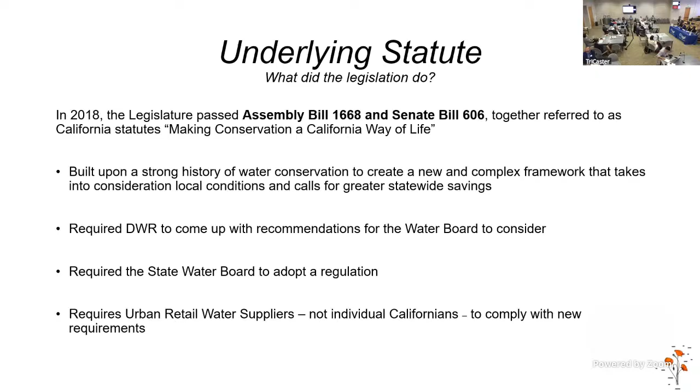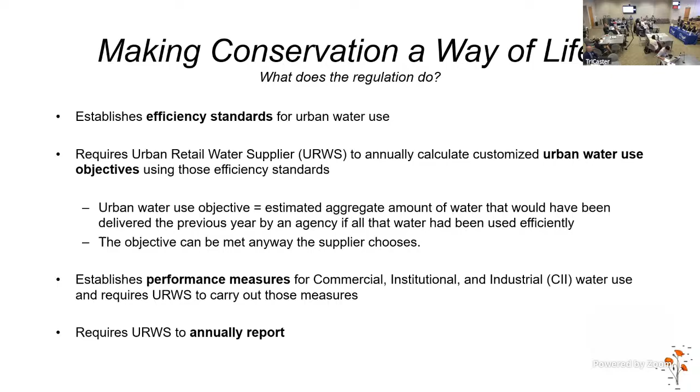The regulation itself that the board adopted was comprised of what we called efficiency standards. The way it works is we developed efficiency standards—for things like indoor use and outdoor use—and the water suppliers are then required to develop water budgets that they have to comply with based on those efficiency standards. It also established performance measures that apply to commercial, institutional, and industrial users. And then, like I said earlier, it required the urban water suppliers to report and comply with these water budgets.

This graphic here, sort of like an equation in graphic form, really is what I consider the corpus of the Making Conservation a Way of Life regulation. It requires the water suppliers to calculate what's called a water use objective, which is essentially another word for budget. Objective was the word in the legislation, and it's the word we use in the regulation as well, but that essentially is a budget. And this budget is comprised of a combination of variances.

These are basically special additional budgets for things that are unique to various water suppliers—things like water suppliers in the desert where there's a lot of water use associated with using swamp coolers, or service areas where maybe there's a heavier presence or prevalence of livestock, things like horses and llamas. To give you a sense of the complexity of the regulation, it actually specifies that for a llama, the efficient use of water per day is 8 gallons. That's just an example, but it's very detailed.

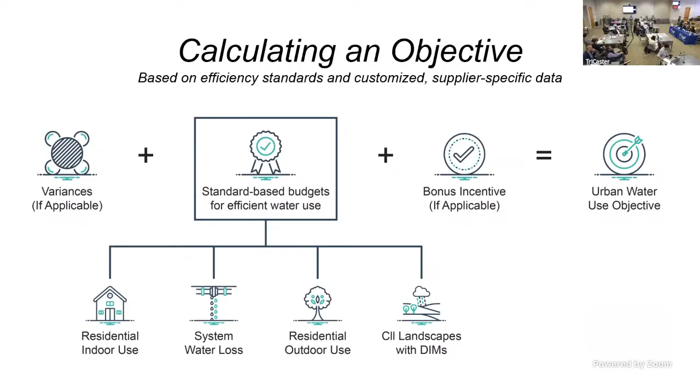So the regulation doesn't apply to any individuals. It applies to the state's 400 largest urban water suppliers. Urban water suppliers range in size from LADWP to very small suppliers, where the smallest level would be a supplier who has 3,000 service connections or delivers more than 3,000 acre feet a year.

Okay, so in August 2023, we began our rulemaking process, and that's when we put out our draft of the regulation. I don't want to make it sound like that was the beginning and there was no work before that. I have a subsequent slide where I'll talk about some of the public engagement. But we did a lot of pre-rulemaking work, both the Water Board and the Department of Water Resources.

We officially began the rulemaking process in August 2023. That starts a clock of one year in which you have to complete the rulemaking process, and if you don't complete it, there's essentially a reset and you have to start over. So a year, as I learned, is not a whole lot of time to get across the finish line on a regulation like this.

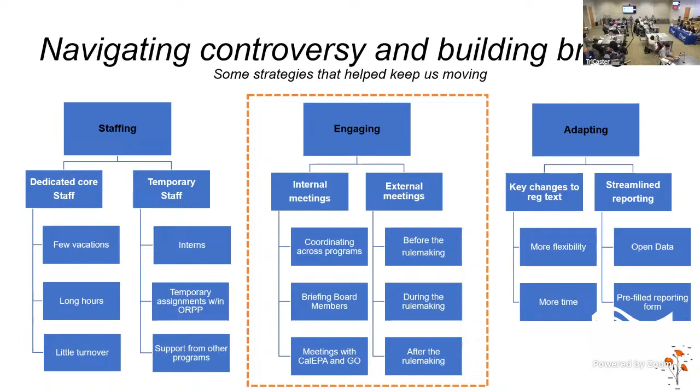But to me, of these three ingredients, the secret sauce was the engaging element. That is where the tide shifted and the momentum started moving more in favor of progress, I would say. So let's go to the next slide, where I want to focus a little bit on the engagement part.

After the workshop, the board directed us to do more engagement. So we created this work group process. It was November and December of 2023—the holiday period. We held over 20 multiple-hour work group meetings scheduled during this two-month period. We invited thought leaders from the water conservation community, both from the water supply perspective and the environmental perspective.

At our first meeting, we put together a list of all the concerns we thought we heard, and we talked to them about it. We asked them, are these the right things? Is there anything you want to add? We went through that process, then divided the concerns into a series of 4 or 5 different sub work groups, and held these 20 meetings over the holiday period, making sure first we understood the concerns.

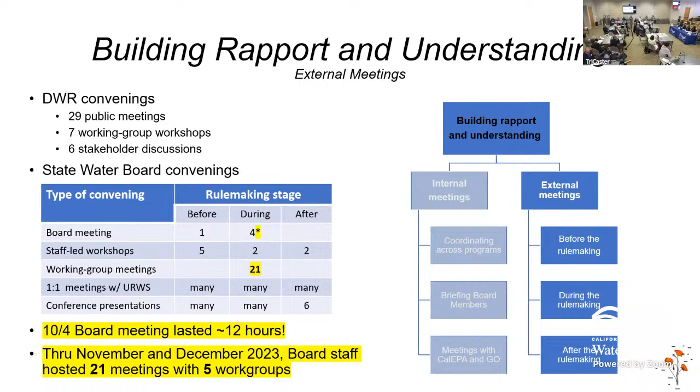The other communication that was really important was our internal communication. We did a lot of staff outreach, talked to different divisions and organizations, got their input. Most importantly, we set up a series of detailed briefings for our board members, where we listed each issue identified as a concern from one stakeholder or another. Where there was consensus, we had a recommendation, and generally our board likes consensus—if everyone agrees, we tend to go with that. But more often than not, there were areas with divergent viewpoints, and all we did there was document the water supplier perspective, the conservation group perspective, a recommendation, and options.

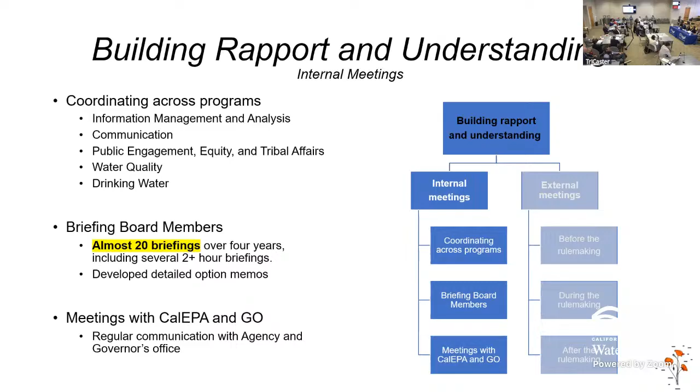And we methodically went through a series of multiple briefings, got our board members' perspective, and then used the totality of the input from our board and from the stakeholders to make adjustments to the regulation I talked about earlier, mainly more time and an alternative compliance pathway. There were many more changes, but those were the big ones. Let's go to the next slide.

We put out the revised regulation, and I don't want to say everybody was happy. There was definitely concern from the environmental community that we loosened things up too much. In fact, one environmental group leader said the name of this regulation should be changed to 'Waiting for Conservation as a California Way of Life,' which, to my chagrin, I have to admit was a clever line for a newspaper article.

But here I have a quote from Ellen Hanak of PPIC, a well-respected person from a well-respected entity, who put out an editorial recognizing that the water board had listened to the concerns and made changes. The quote states: 'The state water board has made some practical adjustments that will give more flexibility to water agencies responsible for making tough decisions. We commend the board for this, and we hope that it stays its course.' That was a pretty interesting quote—I've never really seen anything like that for a regulatory agency. So I was impressed that they could recognize the board had adjusted.

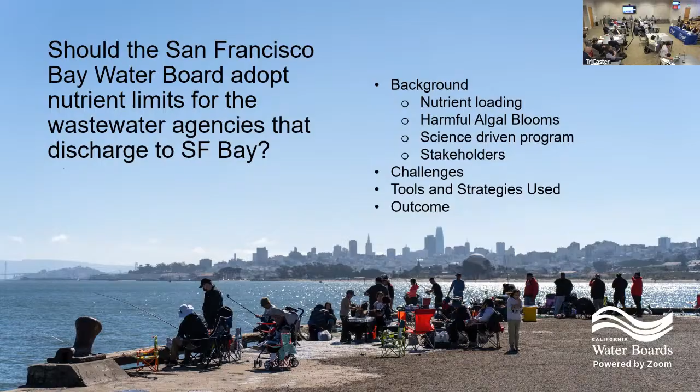Historically, nutrients had not been a problem for San Francisco Bay, because the growth of algae in the bay had been impeded by suspended sediment, which limits light penetration, strong tidal mixing, which limits periods of stratification, and filter feeding clams, which eat up the algae and keep their population low. But as I mentioned, around 2010, there were some clues that the Bay Area's resilience against high nutrient loads in the bay may be waning.

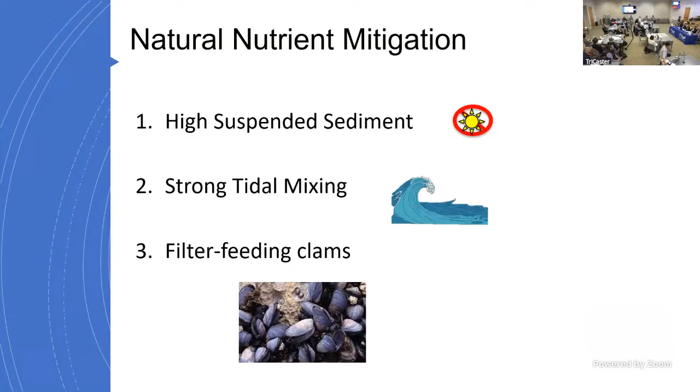Because of these growing concerns, the San Francisco Bay Water Board issued their first nutrient permit in 2014. This did not call for any load limits, but instead focused on better understanding the problem. We worked with the 40 wastewater agencies and said, let's let the science inform the regulations. So we required the 40 wastewater agencies to monitor their effluent discharge to the bay, to know what their discharge of nutrients was. We required them to do a regional study for each of them to evaluate the options for them to reduce nutrients. And we required the 40 wastewater agencies to collectively contribute $880,000 per year over the 5-year term of the permit towards nutrient monitoring, modeling, and science studies.

Then the second permit that the Water Board issued in 2019 also did not limit nitrogen loads in the bay. However, it did forecast the need to cap nutrient loads with a 2024 permit. The 2019 permit continued the effluent monitoring required of the wastewater agencies, requiring them to report yearly their nutrient loads. We required a study by each of the wastewater agencies: the first permit looked at conventional treatment options to reduce nutrients; now we said we want you to look at multi-benefit solutions, like what you can do with water recycling and reducing nutrients, or implementing other nature-based solutions such as horizontal levees.

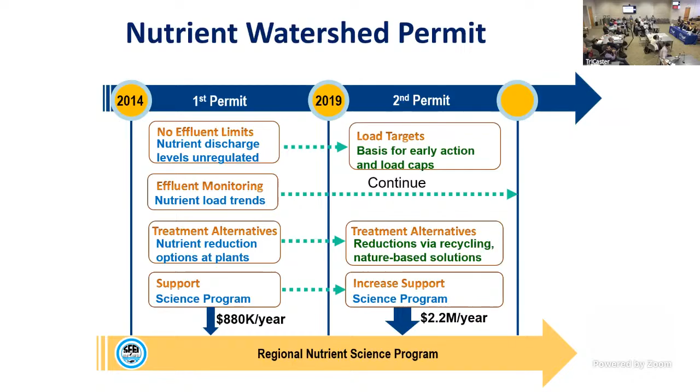Things changed significantly in the summer of 2022 when the conditions that typically limit algae growth in San Francisco Bay were no longer present. That year, there was a significant harmful algae bloom of the species Heterosigma akashiwo. The bloom formed in a channel between Oakland and Alameda and spread to the South Bay, consuming all the nitrogen in the water, resulting in extremely low dissolved oxygen levels over a large area, leading to hundreds of thousands of dead fish throughout San Francisco Bay.

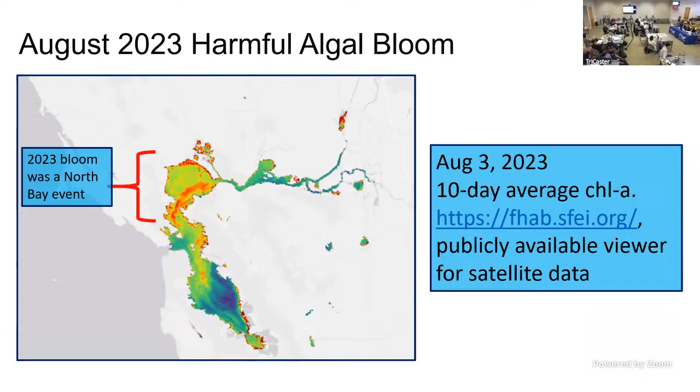It's important to note that nitrogen levels are high throughout the bay, making it susceptible to significant blooms. In 2023, there was another Heterosigma akashiwo bloom, this time in the North Bay. While it was not as severe as the 2022 bloom, it did result in observed fish mortality, including dead sturgeon.

Because of the large algae blooms that occurred in 2022 and 2023, we made findings in the permit that there is a reasonable potential that the wastewater treatment plants discharge nitrogen at levels that could cause or contribute to an exceedance of the basin plan's narrative biostimulatory substances objective during the dry season.

When such reasonable potential exists, federal regulations require that the permit include effluent limits that are protective of water quality. To develop numeric limits, we translated the narrative biostimulatory substances objective by using a calculated criteria for dissolved oxygen and supplemental information.

Now I want to take a minute to explain how we established our quantitative relationship between wastewater nitrogen loads and dissolved oxygen levels in San Francisco Bay, and then how we use this relationship to determine the load reductions necessary to achieve the narrative objective. This detail is an important part of the decision criteria we ask the board to evaluate, and that we explain to our stakeholders.

So the 2022 phytoplankton bloom is our critical condition for our calculations to establish the relationship. This means that the bloom represents a set of circumstances in which beneficial uses were harmed, and therefore provides the framework for us to evaluate how to reduce the impact.

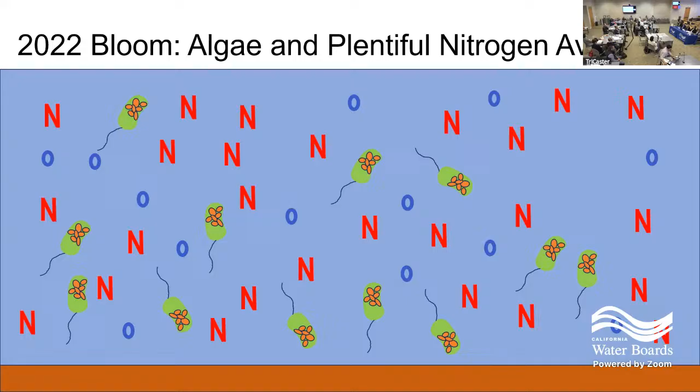But in the summer of 2022, conditions turned out to be just right for the harmful species to grow very rapidly and use up all the nitrogen in the water and achieve a huge abundance. A couple of points to make here: nitrogen in the bay was drawn down to a concentration where we could not really detect it. Basically, the Heterosigma akashiwo were at a buffet, and they were eating up all the nutrients, growing and propagating throughout the bay until there was no more nitrogen.

Second point: because of the chlorophyll measurements, the amount of nitrogen algae produced was comparable to the amount expected if all the available nitrogen fueled the algae growth. Both of these points are important for our calculation approach.

So what happens next is when the bloom ended or crashed, all that phytoplankton died pretty rapidly, and much of it sank to the bottom.

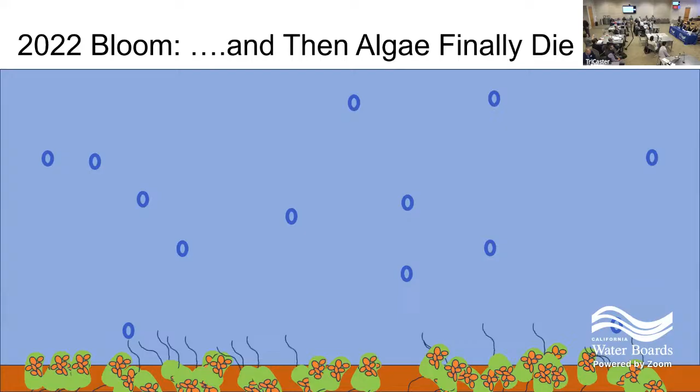And when the dead phytoplankton was digested by bacteria, oxygen in the water was consumed, so that at least temporarily, the low oxygen concentration harmed aquatic life, resulting in massive fish kills throughout San Francisco Bay, and as you saw in the photo, in Lake Merritt.

I've run around Lake Merritt for over 20 years, several times a week. I didn't even know there were that many fish in the lake. It was shocking—the entire surface was covered with dead fish, all different species.

Another important piece of information we got from the data collected during the bloom crash was that the amount of oxygen consumed matches what one would expect to be consumed based on the amount of phytoplankton in the water prior to the crash.

So our strategy is to reduce nitrogen loads to limit the nitrogen available for algae growth, for a severe bloom like 2022. We don't want them having that buffet anymore and allowing the propagation—they can't control themselves because they just eat it all up. So if there's going to be a bloom, the reduced nitrogen would mean less algae produced and more oxygen left after the algae are digested.

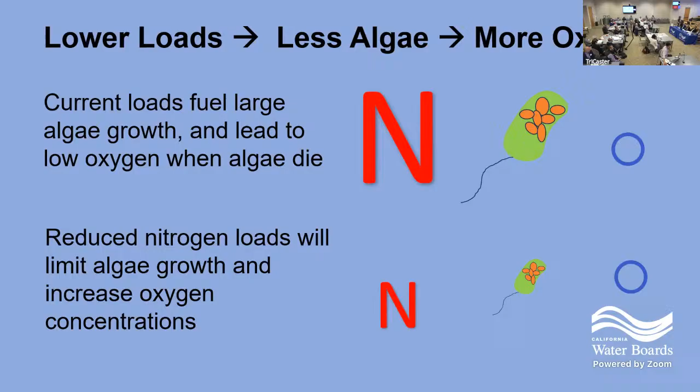The first question we needed to answer was: how much oxygen is enough to protect beneficial uses such that we can meet the narrative objective?

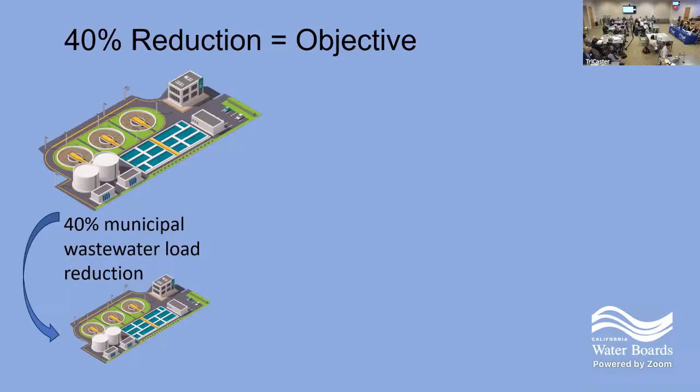So we found the wastewater load reductions of 40% from the 2022 baseline would reduce the nitrogen in the bay enough such that, even if all the nitrogen was completely converted into phytoplankton during a severe bloom event like 2022, and then all the phytoplankton was digested by the bacteria, enough oxygen would remain in the bay to protect beneficial uses.

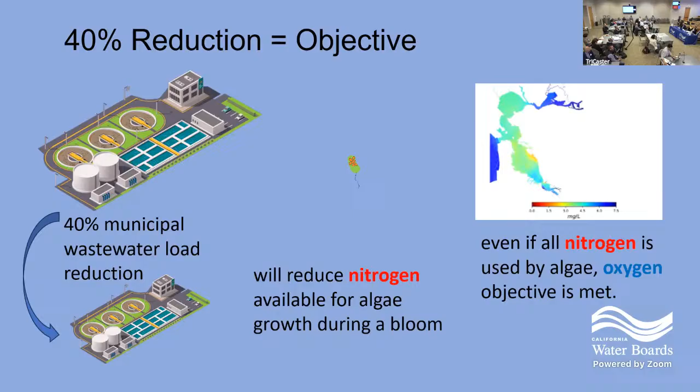Now what I want to do is switch gears and describe how we translated these model projections into effluent limits. So in 2022, wastewater loads were about 44,000 kilograms per day of nitrogen in the bay. So to achieve a 40% reduction that's necessary to protect beneficial uses, nitrogen loads would need to be reduced to about 26,700 kilograms per day.

So the permit took a bay-wide approach to final compliance because the entire bay has high nitrogen loads and is vulnerable to nutrient enrichment. So if the bay-wide or aggregate load limit is met, each discharger is considered in compliance. If it's not met, then dischargers that don't meet their individual limits are in violation.

We worked extensively with the stakeholders. And when I say extensively, we met individually with each of the 40 dischargers, and we met with them as a group. We met with Baykeeper. We met with Sierra Club. We met with EPA. Finally, I'm like, how do you thread this needle? They all have different opinions.

Baykeeper, Sierra Club said why don't you reduce nutrients by 70%? Some dischargers were on board with 40%. Some said no. So we brought them all in the same room. It's like bringing my 3 sons in the same room. We're going to work it out. So we brought them all in the same room and let them all hear each other's opinions, and kind of weaved it, like threading the needle, figuring out what's reasonable and what the science is saying.

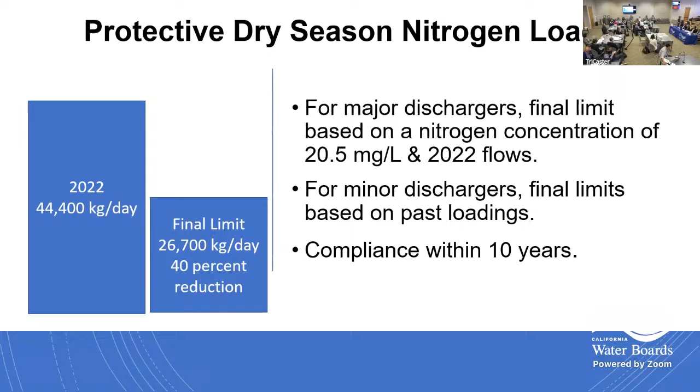So then the big challenge was the 10-year compliance schedule. And they said, we want more time. And so what I explained to them is, per the state board compliance schedule policy, we're all one water boards, the maximum time we can allow is 10 years. But we recognize for multi-benefit solutions such as water recycling or horizontal levees, they do take longer. So we said, we will see what we can do to get you more time, and I'll talk about that in a minute.

So now that I've covered how we developed the nitrogen limits, I just want to briefly summarize the third permit. Like the first 2 permits, it required monitoring and reporting. They had to continue to fund the science program at a tune of $2.2 million per year.

And I want to acknowledge now, when we took the permit to our board in July of 2024, we had been working for 10 years under a permit with the wastewater agencies in the Bay Area. And I want to acknowledge that they had contributed at that point $15 million to the monitoring and the studies to make sure we had good understanding to inform the regulations. And with this new permit, they're committing to continue to fund $2.2 million per year of the studies.

We have interim and final limits, and basically we've asked them to work together in regionally planning their upgrades. And then I'll talk more about the 10 years in a few minutes.

So this has really been a stakeholder-driven process, and you've got the regulators who want to do the right thing and inform the science. You've got the scientists who, some of these PhDs, no offense to any PhDs in the room, can get really into the science, and have to make sure we see the forest through the trees, and we have to take the science and interpret it and make policy decisions, bring those to our board. That's our job. And then you've got the enviros who really want to protect the bay. They're not as concerned about the money.

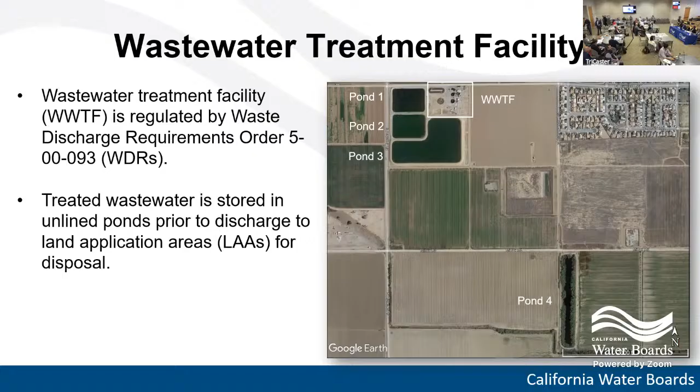Their wastewater treatment facility is regulated by Region 5 under a WDR, waste discharge requirements, and they treat wastewater and store it in unlined ponds prior to discharging to land application areas.

So this event, what led up to this event started actually, like most enforcement cases, several years before. In 2021, the city called up the regional board and let them know that they self-reported their non-compliance with the WDRs. The city engineer let them know that they were having issues with one of their ponds, specifically Pond 3. It was constructed largely above grade, and they were having seepage issues.

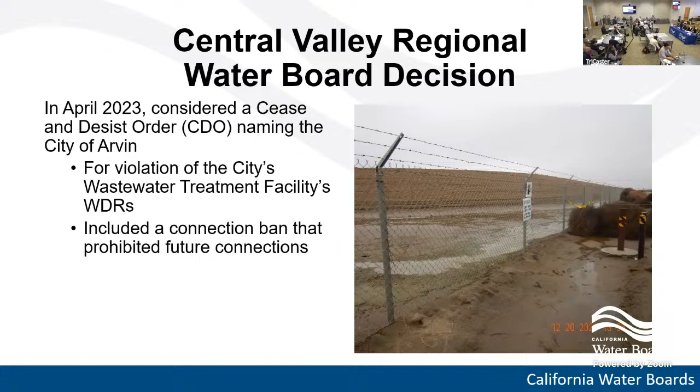Really what triggered it is in 2023, regional board staff went back out to the facility. They conducted additional inspections. They noted that the city was applying unauthorized land application areas, using them at non-agronomic rates. They were still using Pond 3, even though it was in disrepair and having issues. Ultimately, what regional board staff concluded was that the city did not have adequate storage and disposal capacity to manage their current wastewater stream.

Restricting connections was going to be necessary, wastewater connections, to make sure that the city could make the required repairs, which were going to have to occur over a number of years, and return to compliance with the WDRs, or acquire a new permit or an amended permit, as well as additional land application areas. So staff prepared a cease and desist order based on the city's WDR violations going back to 2021 and through the course of this time, and brought it before their board.

So what was the regional board staff's perspective? They were generally concerned about not only the pond seepage and the wastewater that was coming out of the pond that was near a road site. There were land application areas and kind of default ponds being created with some bermed areas that the city were using, and public access to those areas without signage. There were a number of issues going on, but ultimately it was just the long-term sustainability. Continued growth and construction in the area was only going to increase demand on this already dysfunctional system, and they needed to find a way to get it back into compliance.

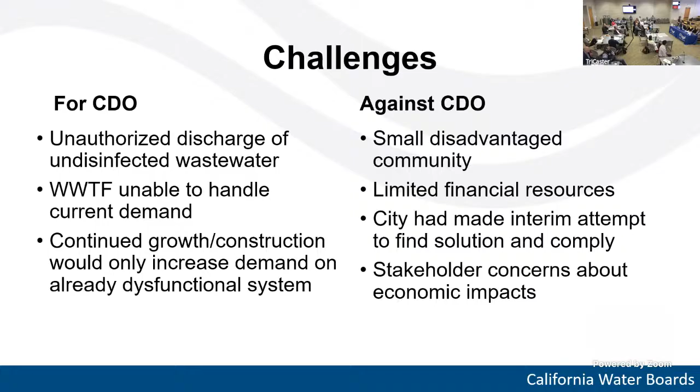Yeah, so the decision, next slide please. The board ultimately did decide to adopt the cease and desist order and support staff's recommendations.

The CDO, as it was drafted and first came to the board, had already taken into account some of these concerns and considerations in the way the connection restriction was drafted. It wasn't just a straight up ban. It prohibited future connections where future development did not yet have a building permit as of the date of the cease and desist order.

There were exemptions for projects that would alleviate extreme public hardship or public health problems. And then there was a provision, I think originally drafted for the board, but at the hearing there was some additional discussion and they changed it to allow the executive officer to grant additional exemptions to the connection restriction based on specific findings. I'll talk about those a little bit later.

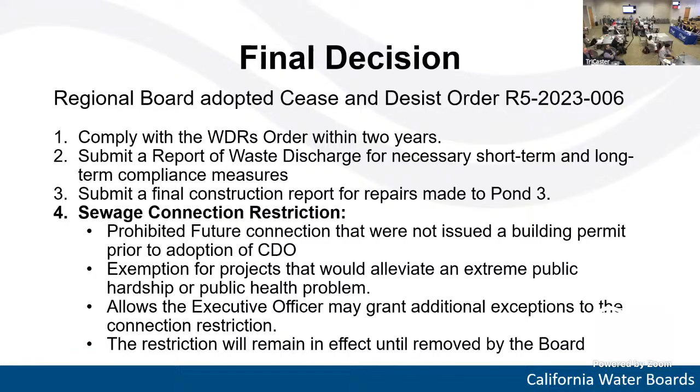And this ban is to remain in effect until it's removed by the board. So it was a hard decision to make. The board made it. I can't speak from the board's perspective, but I'm going to talk about some tools and strategies that helped get there, I think.

So one, we have an enforcement order that is acknowledging some of the concerns and offering some creative solutions. It's drafted in a way, the connection ban, that it wasn't just a blanket ban. It had some room to adapt over time. It allowed for some additional exemptions where necessary, based on specific findings.

And some of those specific findings that I thought were kind of important: the city had to demonstrate that they had taken actions and had the means to complete corrective actions necessary, that they were on the path to compliance, and that granting those additional exemptions wasn't going to prohibit them from getting there.

It invested authority in the executive officer to grant those conditions and make those findings and grant those additional exemptions at a time in the future when the facts would be better known about what exactly was at stake, and could weigh those risks and benefits. And I also look at what the city had done in the interim.

Then also, I think there was a clear connection here between the remedy and the concern, the water quality concerns at stake and the remedy being sought. It was because those future connections would exacerbate the concerns and exacerbate the water quality issues for which the order was being brought in the first place.

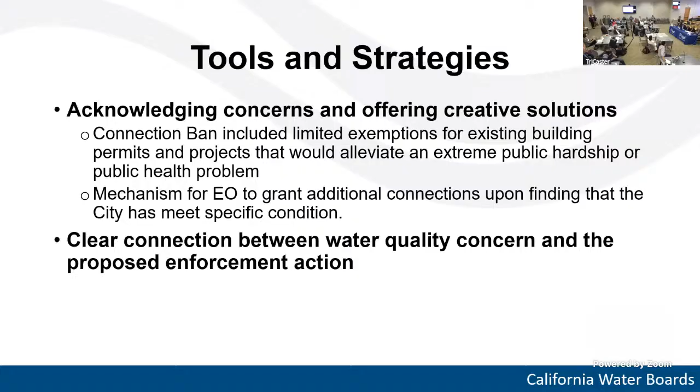Yeah, we're going to talk a little bit about lessons learned in the next slide, but I do want to say this isn't unique in the sense that enforcement in this instance wasn't the solution. There's not always a solution when we bring in enforcement action. Sometimes it's the first step. Sometimes it's just another step in getting to compliance. Here, this wasn't a penalty action; it was injunctive relief.

But there were already negotiations and discussions going on with the city, and I'll be interested in more discussion on this. I think it was important to have an enforceable order with specified deadlines to really focus the city on what resources it did have, and on seeking additional outside resources to work toward the solution. And it is an ongoing issue.

So we're going to talk about the outcome. In 2023, the cease and desist order was adopted. Since then, the city has been successful in obtaining a number of exemptions for four proposed developments that would help increase housing and tax base, and improve its financial stability. They're continuing to have compliance issues, however, and the dialogue is ongoing. They've recently hired special counsel to assist with cease and desist order compliance.

I think they've gone through a number of contractors. They've just hired another one. And the monthly meetings continue.

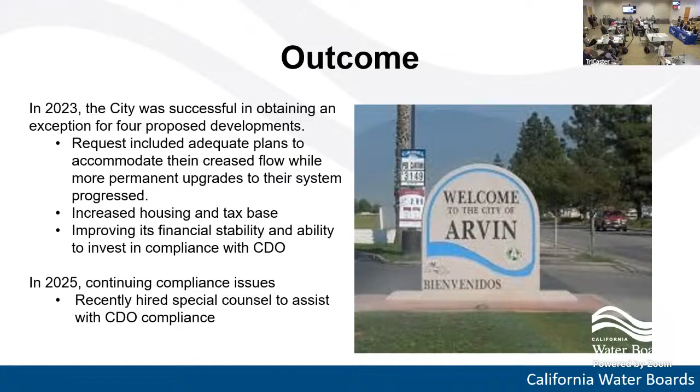All right. Thank you. Thank you. Yeah. Yes, by all means, Patrick. And I know we're out of time, so...

It's a magnetic personality here.

I would add, for any of the boards and any of the board staff who are interested in the advisory team side of that, always open for questions.

I will say incredible amount of credit to the Office of Enforcement and to the regional board's prosecution team in the Fresno office. You often don't associate the word compassion with an enforcement team, but they executed their duty with compassion for this community and the needs of the community.

And the commitment to follow up and the commitment also to being firm with this community really helped bridge the gap. I know I lost a lot of sleep advising the board in advance of this cease and desist order hearing, but it did pay dividends.

And certainly there was even state board money involved in helping find the solutions, at least for some of the ponds that were out there. I do regard it as a success story, even though the final chapter hasn't been written yet.

But like I said, if you have any questions on the advisory team side and how we discussed it with the board, and the intensity of the discussions with the chair leading up to it, feel free to talk to me offline because that was a significant component too.

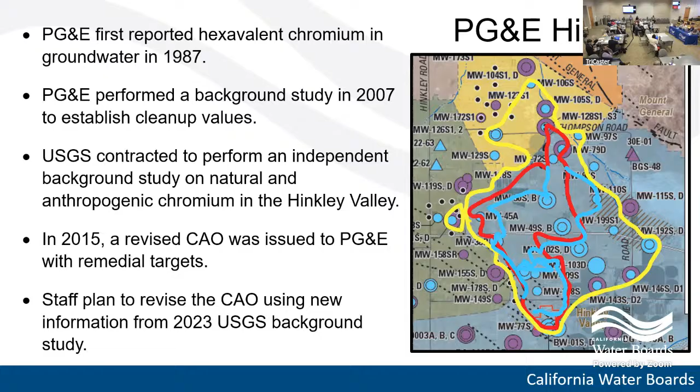My final slide on regional priority is related to our enforcement program. As the lead for the prosecution team, AEO, this has been a focus for me since assuming that role in 2021. Not tooting my own horn, but I'm certainly the head of our enforcement program.

And Yvonne, wherever you are, thanks for all your support and helping us do that. I'll toot your horn too.

Another thing that's been really helpful with this enforcement program is retired annuitants. They play a huge role for us in reestablishing this program and providing a solid foundation in terms of our enforcement approach and developing strong enforcement documents and orders.

Another huge improvement for us has been the role of our enforcement coordinator, a position we created a couple of years ago, which has been instrumental in our success. I want to thank Region 3 for the preliminary conversations we had with them about setting up a position like that.

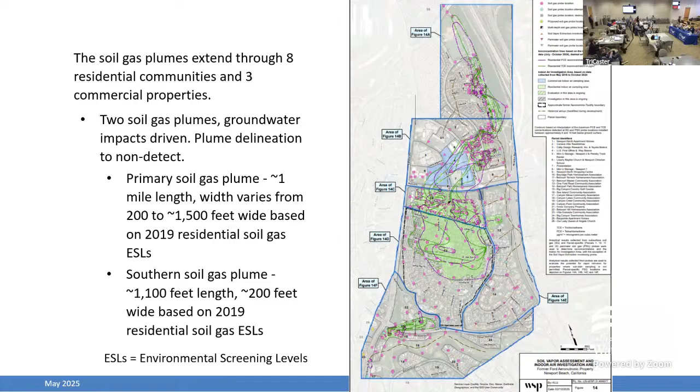They have performed soil gas sampling at locations throughout this area 2 to 3 times per year. They also targeted almost 600 homes for investigation. In the end, they were granted access to about 400 homes. A number of homeowners, quite a large number, opted out for various reasons, so they were able to sample some 400 homes.

They also did groundwater investigation in select areas, and the remediation they're developing is a combination of soil vapor extraction to remove the larger plume, as well as subslab depressurization in a few of the homes to actually address the vapors in the homes.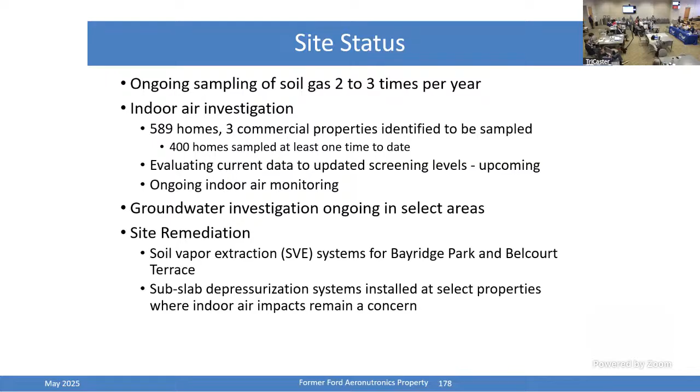With our next slide, you will see the area in yellow, which is where we have subslab depressurization systems. One of the things you'll notice is that they are actually outside of the main area where much of the R&D occurred.

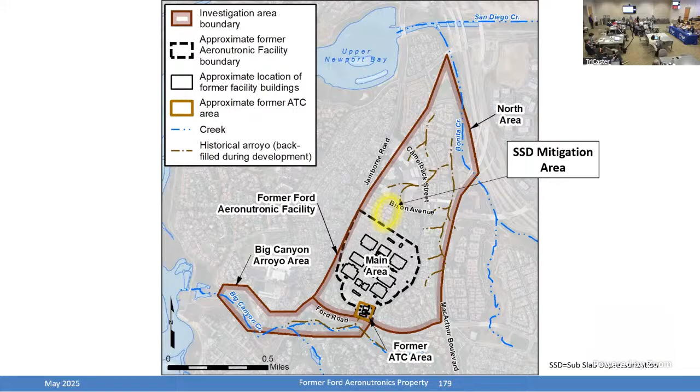If we can have the next slide, we installed 14 subslab depressurization systems. They've been operating since November 2023. We also had to replace a lot of the air purifying units, since a lot of times when these kinds of things happen, they put air purifying units in there. We've actually had Ford go back in to confirm these systems are operating properly.

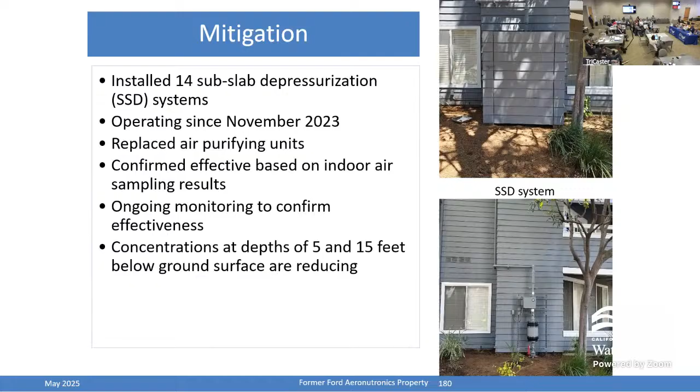And like a lot of these soil gas sites, the bulk of the contamination is typically found about 5 to 15 feet below the ground surface.

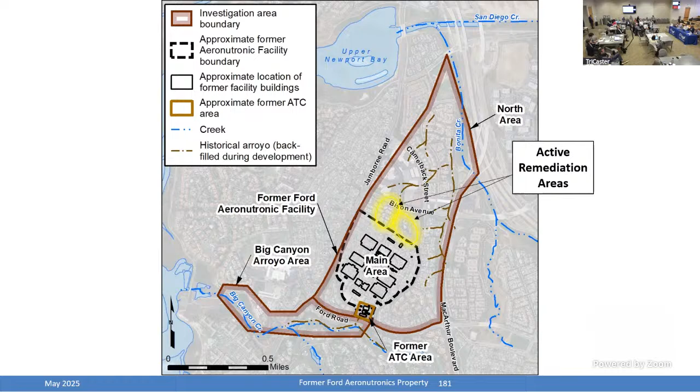If we could have the next slide, you'll see where our soil vapor extraction systems are located. We actually have two of them. One is in the community of Bayridge Park, and the other is Belcourt Terrace. If we could show the next slide.

You can see what's outlined in blue is the soil vapor extraction system in Bayridge Park, a large condominium complex. The most optimal locations to put your soil vapor extraction wells or probes wind up being in people's living rooms, underneath the barbecue in their backyard, or in the jacuzzi in the clubhouse complex—you just couldn't do it. They had to instead rely on common areas, on roads, and other places where it didn't impact the residences. So that became a rather large challenge.

In fact, despite their best efforts, a couple of residents objected to it because they felt the systems would be too noisy, too loud, unsightly, and some other things. Luckily, the city of Newport Beach granted the permit for Ford to install that extraction system, so that worked out pretty well.

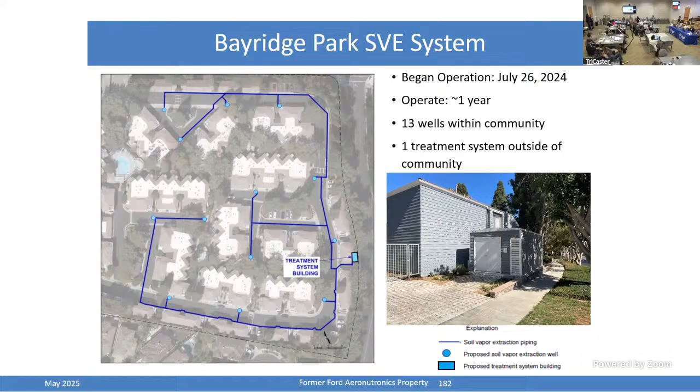You can also see in the next slide our other soil vapor extraction system, a smaller one in Belcourt Terrace, with 8 wells in this community. Like the other system, it's been operating for about a year now.

This is located in what's now a very affluent community. Many of these people, when they bought their homes, townhouses, or moved into their condominiums, were under the impression that the site had been cleaned up. So needless to say, it wasn't very pleasant news for them to suddenly find out there were still contamination issues there.

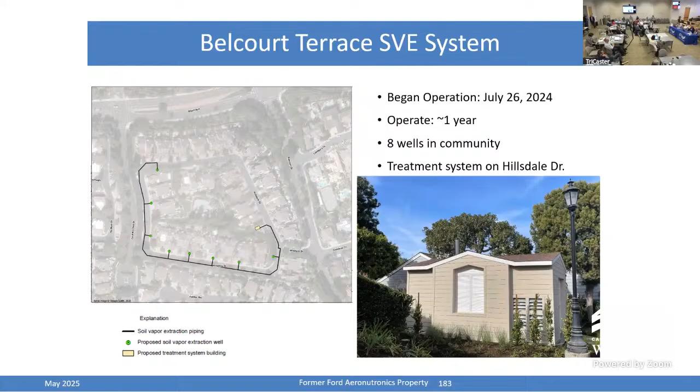She's a geologist. We were extremely lucky to have her as the project manager, a tremendous communicator, very empathetic individual. She had a way of being able to reach out to all the residents, to the elected officials, to the city staff. She's been working very effectively with Ford Aerospace. And I think she's a huge reason why this has worked out so well, and we've been able to get such a very complicated project through.

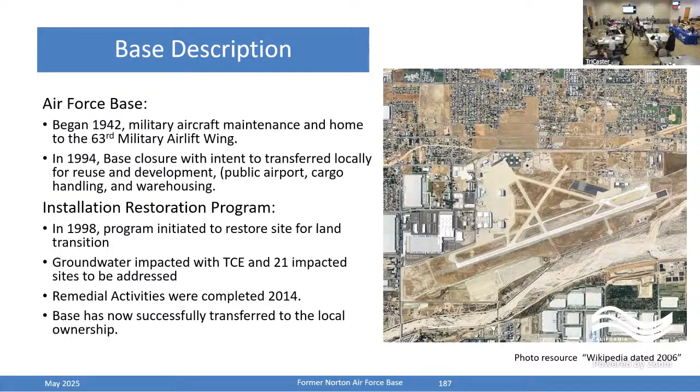So because of the effectiveness of this cleanup, if we can go to the next slide, US EPA, DTSC, the Regional Water Quality Control Board were recognized along with the Air Force for excellence in site reuse. And we had that award ceremony back in September.

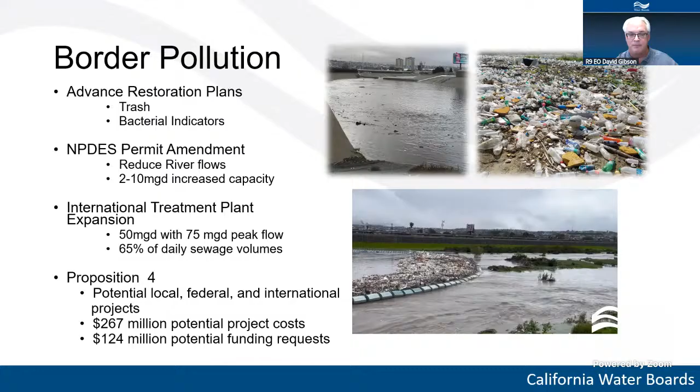Key NPDES permits address a number of key beneficial uses in key areas. Several backlogged permits, as a result of US EPA delays and funding delays at the regional board, are coming forward this year. The Point Loma Ocean Outfall is probably one of the first permits that will test new language after the Supreme Court decision last year that you heard about from Michael.

It includes a 301H waiver issued by US EPA, so we'll have joint hearings. We've already had one, we'll have another this year. It also included, as part of a stipulated agreement for that 301H waiver in the last permit, a continuation of the Pure Water program for recycled wastewater reuse, direct potable and indirect potable reuse projects. Phase 1 is under construction right now. Phase 2 is envisioned to provide about 50% of the City of San Diego's water needs in the future.

The regional stormwater permit, which is a watershed-based permit for all 10 hydrologic units having watershed water quality improvement plans, is also coming up next year. Key issues there include stormwater harvesting and reuse, blue-green infrastructure development to reduce flows and flooding issues, especially in South Bay communities, and the bacterial indicators update or TMDL.

Also, the U.S. Navy. The Navy has 3 main facilities, about 33 ancillary facilities, about 35,000 total personnel and civilian contractors, and 56 ships. It's one of the most impactful potential activities in San Diego Bay and surrounding areas. We have regulated all 3 bases independently. We're consolidating now into one permit. Note, these are separate from the Marine Corps facilities at the training depot, Miramar, and Camp Pendleton.

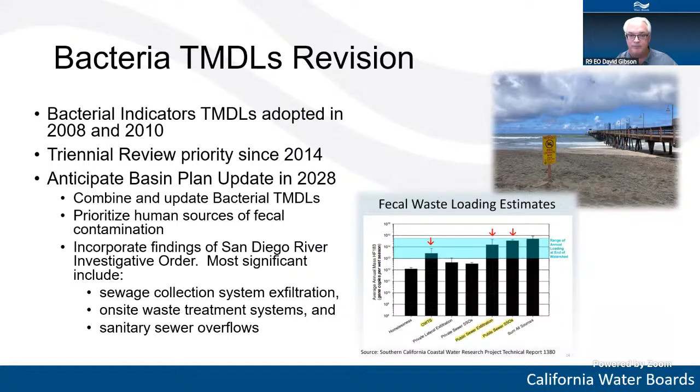Nutrients in agriculture. We may not have the largest farms in the state, but we have a lot of them, about 3,000. And they do contribute a significant amount of nutrients as well as pesticides and insecticides that affect biological integrity. We're addressing those in 2 key ways.

But when they range from open field agriculture, vineyards, and also nurseries that discharge wastewater to several streams contributing to the Santa Margarita River, several agencies in stormwater have already been working with us. We'll be bringing in the Santa Margarita Irrigated Lands Group and the Farm Bureau into that advanced restoration plan to assign loadings to reduce the nutrients to the receiving waters, including the Santa Margarita River.

We plan to adopt that advanced restoration plan in 2026, and then we will update the San Diego region waste discharge requirements for irrigated lands, incorporating source reduction for nutrients from those advanced restoration plans, enhanced monitoring and assessment. We plan to adopt that in late 2026 or early 2027.

The regional board has had a lot of success with TMDL alternatives like advanced restoration plans. The Santa Margarita estuary has already been restored to healthy conditions. The Loma Alta Slough and Famosa Slough have also been restored, and we're working right now on Los Peñasquitas Lagoon, restoring that one - in the case of Los Peñasquitas, an actual TMDL for habitat conversion from saltwater marsh to freshwater marsh. So we found value in the collaborative approach and getting real results in shorter periods of time.

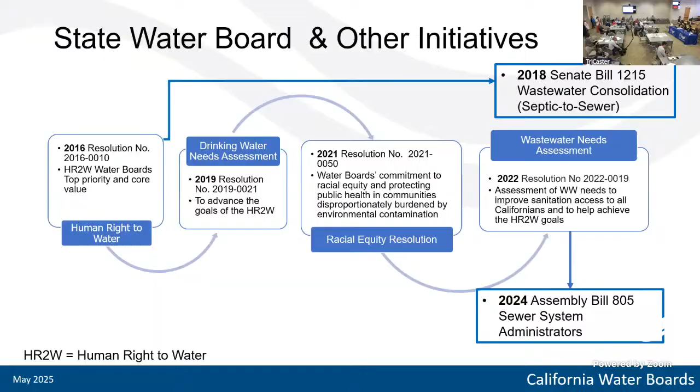To start off, I get the privilege to share progress that California legislation has provided our wastewater programs, starting with Senate Bill 1215, which was signed into effect in 2018 and established authority to create our wastewater consolidation program. It provides us a framework and funding for septic to sewer and consolidation projects, especially for inadequate on-site sewage treatment systems. The authority granted to the water boards provides authority to our regional water boards to really encourage, and if needed, have mandatory consolidation to address these inadequacies and connect them to existing sewer systems.

It also provides some avenues for funding eligibility. This is important for the receiving sewer systems, as they work in partnership with disadvantaged communities, that they become eligible to receive this funding. Next slide, please.

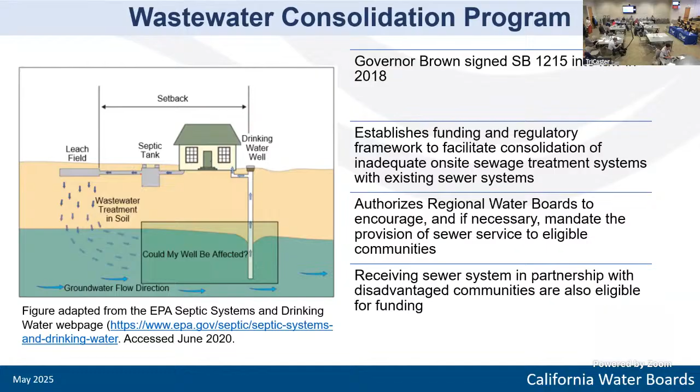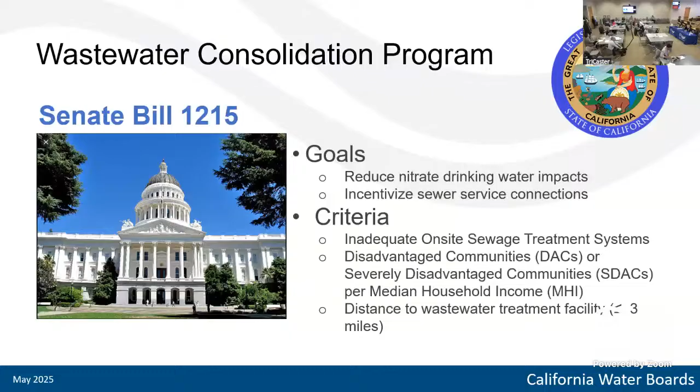Just to review the wastewater consolidation program and its goals, it has two primary goals. The first is to reduce nitrate impacts in drinking water supply, as well as incentivizing sewer service connections. The criteria and coverage this program includes: it has to have inadequate on-site sewage treatment systems, it serves a disadvantaged community or severely disadvantaged community based on median household income, and the distance to the wastewater treatment facility is within 3 miles. Next slide, please.

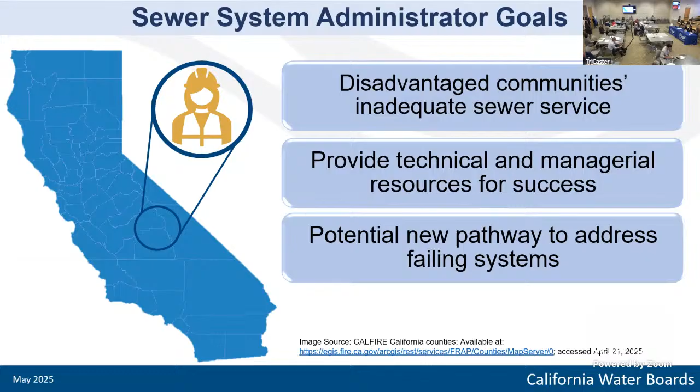Continuing with the progress California legislation has provided us, we also have Assembly Bill 805, signed into effect in 2024, very recently. It established the ability to have sewer system administrators. Some of the goals of that are to service disadvantaged communities' needs for sewer service, providing technical and managerial resources for success, as well as potentially paving new pathways to address these failing systems. Next slide, please.

The sewer system administrators established by Assembly Bill 805 have criteria or coverage that includes disadvantaged communities, inadequate sewer systems, and especially those demonstrating failures, including a history of failures due to technical, managerial, or financial deficiencies or gaps. The Water Board's authority under Assembly Bill 805 is administered through the Division of Financial Assistance and the Division of Water Quality, which is why we're here today, providing us the authority to appoint an administrator and designate inadequate sewer systems.

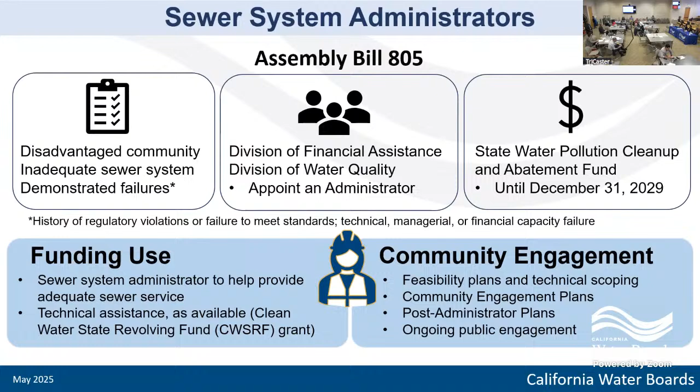Funds are also being utilized to have community engagement where feasibility plans and technical scoping will be conducted, and community engagement plans and post-administrator plans will be developed by the administrator, continuing that ongoing public engagement in order for those plans to really fulfill the needs of these communities.

Next slide, please. So this is kind of the fun story of how we got here.

The bullets start with September 2024, but I do want to take this moment to really acknowledge that this has been ongoing for a long time. There was a lot of pre-work done by our community advocates with Community Water Center and a lot of other people who really raised their voice to speak on behalf of the needs of this community, which represents, honestly, a lot of communities in California.

In January of 2025, under Assembly Bill 805, the State Water Board was directed to update the Division of Financial Assistance Administrator Policy Handbook to include the criteria for designating an inadequate sewer system, as well as how we identify an appropriate sewer system administrator.

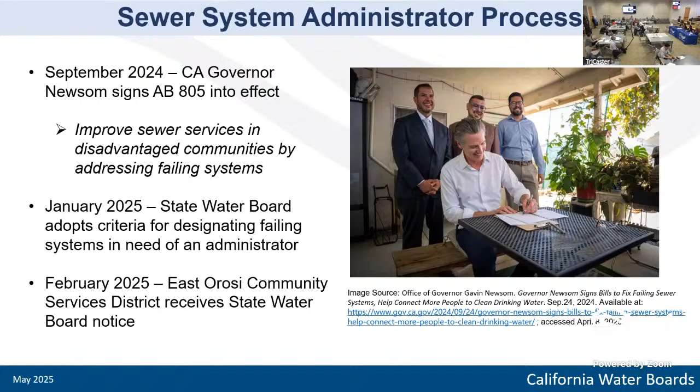We received oral comments and reviewed what the notification letter was that we sent and what it means to identify East Orosi Community Services District as a designated sewer system, along with this administrator process and next steps.

The feedback during this meeting was all positive, including from East Orosi Community Services District, who was there, Tulare County, who is our proposed administrator for this project, the Community Water Center nonprofit who's been advocating for this community, as well as the community members who were all present and shared that consensus together.

Now that the public meeting is done, the next step is for the Division of Water Quality to develop a water quality order and resolution of findings, which will be signed into effect by Eric Oppenheimer, our executive director, to speed this process along as fast as possible. That's also feedback we receive from the community: when is this going to happen, when will this take place?

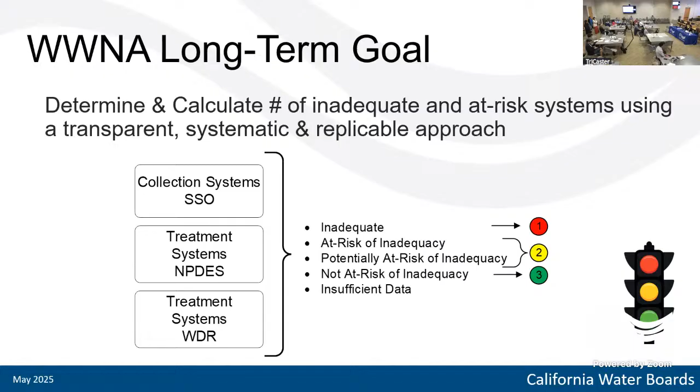Phase 1 started in 2023 and is almost completed, and the team has scheduled the submittal of the phase 1 report in June of 2025. The main goal of this phase is to evaluate the baseline situation of wastewater infrastructure and services across the state and identify data gaps due to many different aspects, CIWQS being one of them, and to develop a roadmap for data collection and a risk solutions framework.

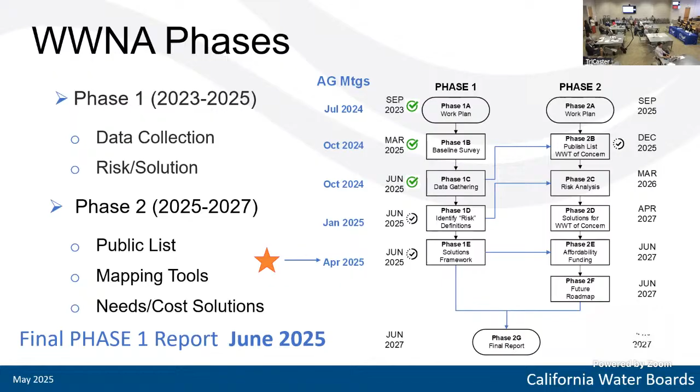So in terms of the completed and upcoming milestones, I would like to emphasize these 5 tasks, beginning with the wastewater systems information gather.

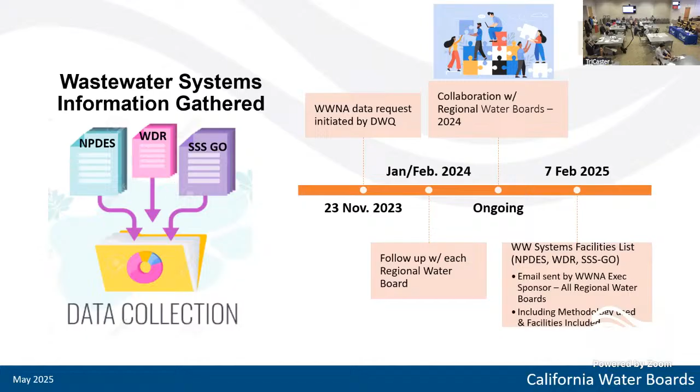The original wastewater needs assessment data request was initiated by the Division of Water Quality Deputy Director in November of 2023. This was followed by individual meetings held with each of the 9 regional boards during January and February of 2024, continuing with ongoing coordination and collaboration with the regional boards throughout 2024, for which we are very thankful, as Annalisa pointed out, for all the time invested in validating and identifying data gaps for this data gathering process. We finalized this milestone by sharing a working facilities list with all the regional water boards in February of this year.

The wastewater needs assessment team is facilitating and managing the advisory group members' meetings. The advisory group was not part of the initial scope, but UCLA recommended its formation to obtain more diverse engagement outside of the wastewater needs assessment team and the water boards. The advisory group kickoff hybrid meeting was held in July 2024 at the Central Valley Regional Water Quality Control Board in the Rancho Cordova office, followed by 3 additional meetings.

We have Debbie Webster, our executive officer from the Central Valley Clean Water Association, representing all the wastewater treatment facilities within the Central Valley. We also have Jasmine Diaz, a program manager at the Rural Community Assistance Corporation, or RCAC, one of the 2 main technical assistance providers that have a contract with DFA. But we also have community representatives, so it's a very diverse group.

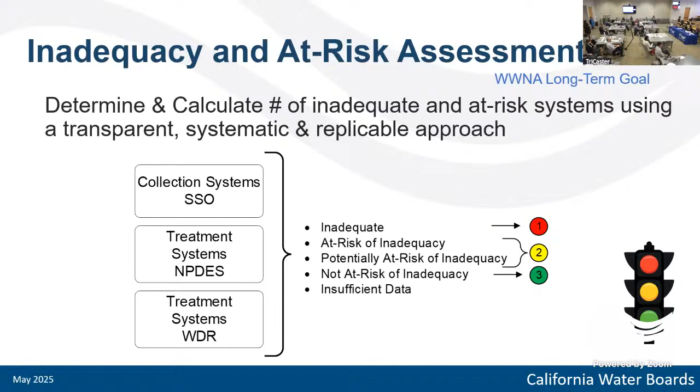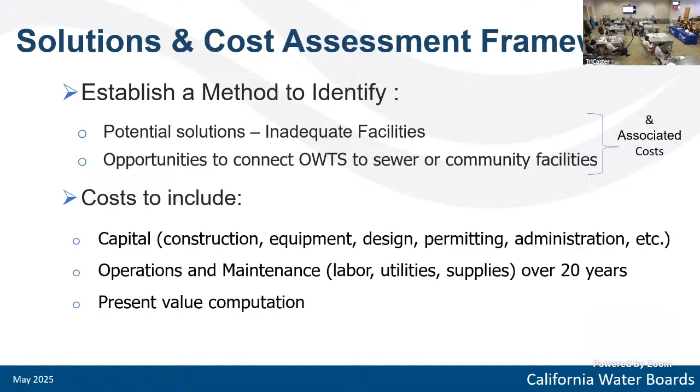The solutions and cost assessment framework task is also in progress, and the main goal is to establish a method to identify potential solutions and associated costs for facilities determined to be inadequate, as well as to identify opportunities for on-site wastewater treatment systems to connect to sewer or community facilities and estimate their potential cost. This cost analysis will include capital costs such as construction, equipment, design, and permitting, as well as operations and maintenance, and all of this analysis will be done using present value computations.

This is a general overview of how all the previous pieces that I mentioned and completed tasks are interconnected for both wastewater treatment systems and collection systems, and also on-site systems.

In the case of wastewater treatment and collection systems, the wastewater needs assessment team began with initial data gathering from CIWQS and validation by the regional water boards. Next, they developed inadequacy and risk criteria for NPDES, WDRs, and sanitary sewer system facilities, bringing us to the current stage, which is creating a framework for identifying solutions and assessing costs for these inadequate facilities.

These results will provide high-level insights to support state water board planning efforts and inform local decision-making, especially in communities seeking reliable sanitation and infrastructure solutions.

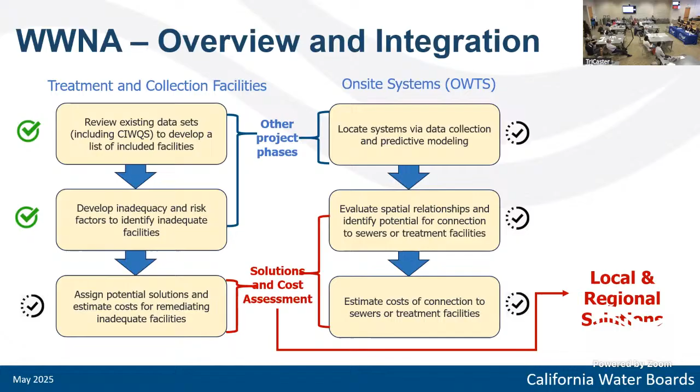And this sets the stage perfectly for Erica Calve to share the wastewater needs assessment long-term vision for regional and local solutions. All right, we'll go to the next slide.

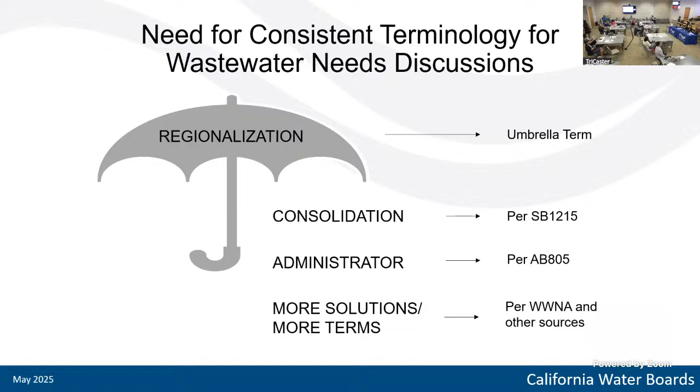So together, with the clear and consistent terminology and all the great work and critical thinking being led by Danya, by Stephanie, by our partners at the regional water boards, by the wastewater needs assessment team at large, and many others, we are starting to talk about the bigger picture and vision for the future, and how to be strategic in our approach to addressing these various types of sanitation needs we face.

We plan to take a holistic approach to solutions and regionalization, and optimize resources as much as possible to address the complex needs of the impacted areas. We need clear and consistent terminology, and we need to integrate the findings of the wastewater needs assessment and the water board's experience.

One of the huge findings we're already aware of is the need for data and information that is accessible and usable. So one of the things for our strategy will be to make sure we have the data collection and data management systems in place to make that information readily available, so that when we become aware of an issue or a need, we're able to act swiftly.